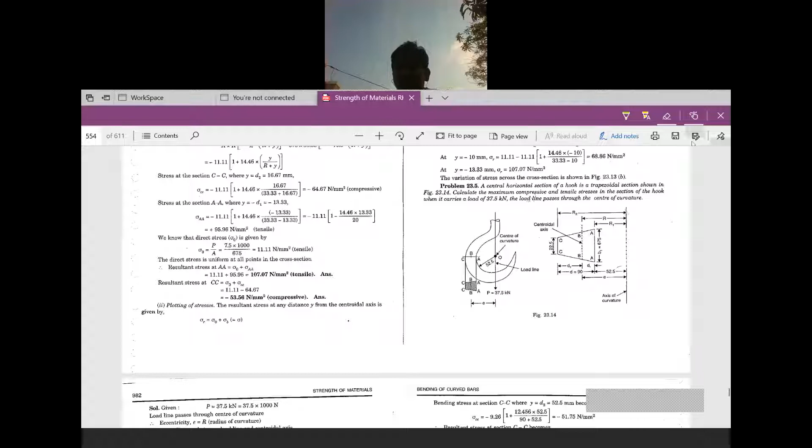Ima, do you have any doubts in the previous sessions, previous problem, previous class, or the first class? Do you have any doubts in the fixed beams? Do you have any doubts in the curved beams? Sir, yesterday I have explained the three problems. Have you gone through it?

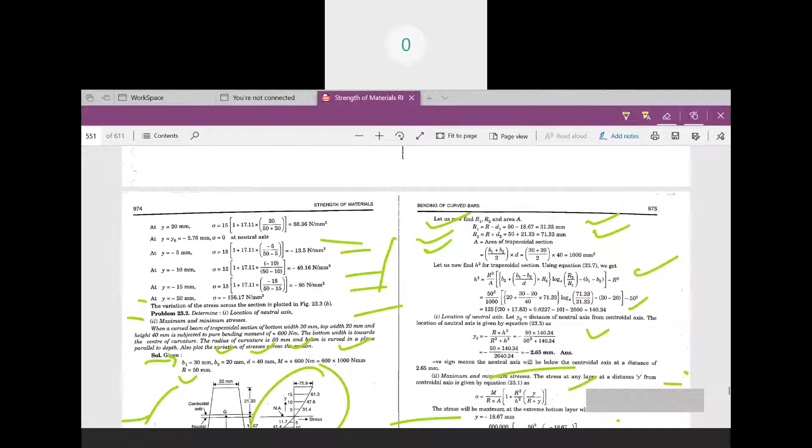Okay, I'm going to start the next section. Today also I am explaining some of the problems, numericals. Then for the next class, we'll go for derivations.

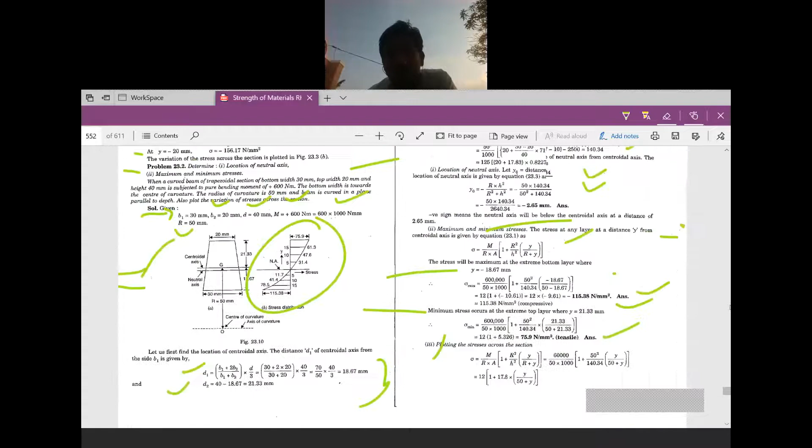So yesterday we have done some problems on the stresses on curved sections, standard sections like trapezoidal, rectangular, and circular sections. We have solved some of the problems on these models. Okay, now we are going for the applications of curved stresses.

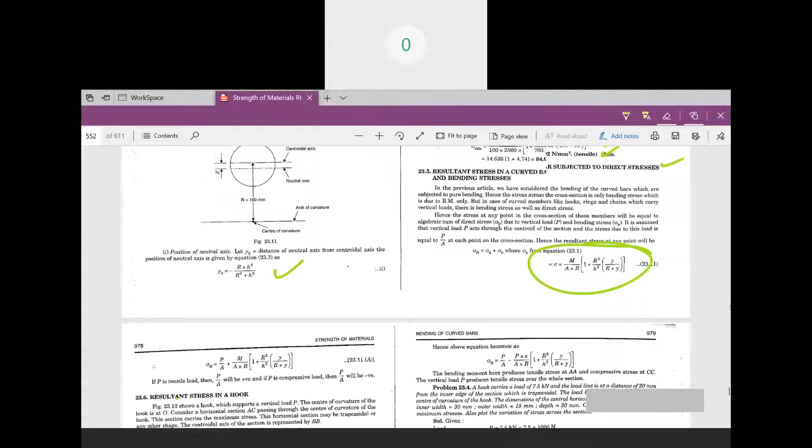Yesterday I have told you here the resultant stress in a curved beam or a curved bar, which is subjected to direct and bending stresses, is sigma r is equal to sigma naught plus sigma b. This will be the resultant stresses acting here.

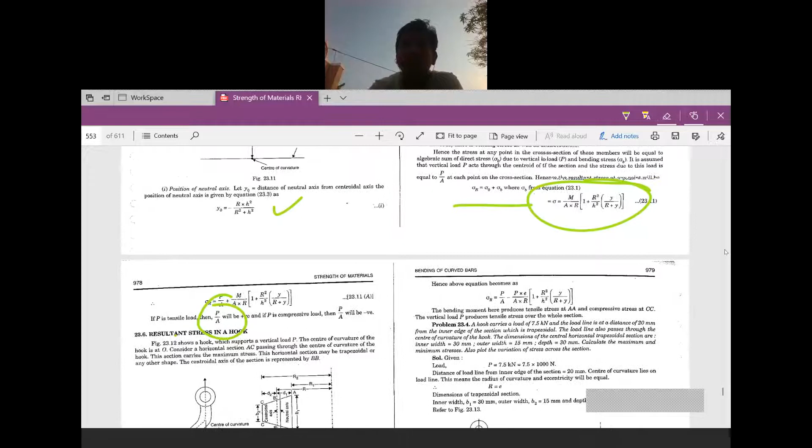Okay, using these stresses, you have a formula sigma r is equal to sigma naught plus sigma b. Sigma b is nothing but the bending stress in a curved beam, whereas sigma naught is a direct stress, which is nothing but p by a. Understand? You have p by a, that is load by area, that is a direct stress.

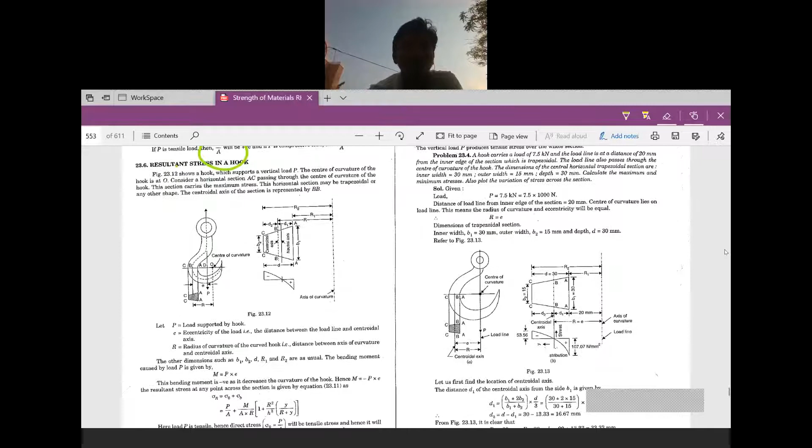Okay, here you are going to study about the resultant stresses. When you see the diagram clearly, here he has given one diagram. Crane hook with a trapezoidal cross section.

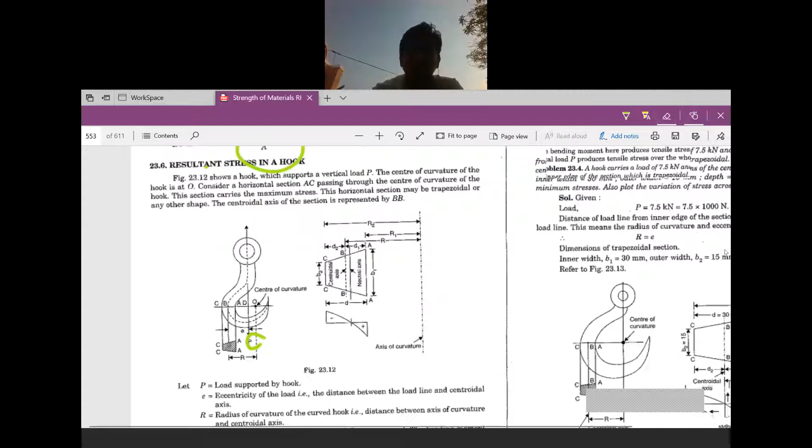Figure shows a hook which supports a vertical load P at this point. When you consider a vertical load here, it is acting exactly at the center of the axis, at a vertical axis. The center of curvature of the hook is at a point O.

When you see here, you have a point O at this point. Understand? Then consider a horizontal section AC which passes through the center of curvature of the hook. We have AC, this is the horizontal section, which is passing through the center of curvature.

The section carries a maximum stress. The horizontal section may be trapezoidal or any other shape. Here he has given a trapezoidal. It should be either trapezoidal, rectangular, circular, or any other shape.

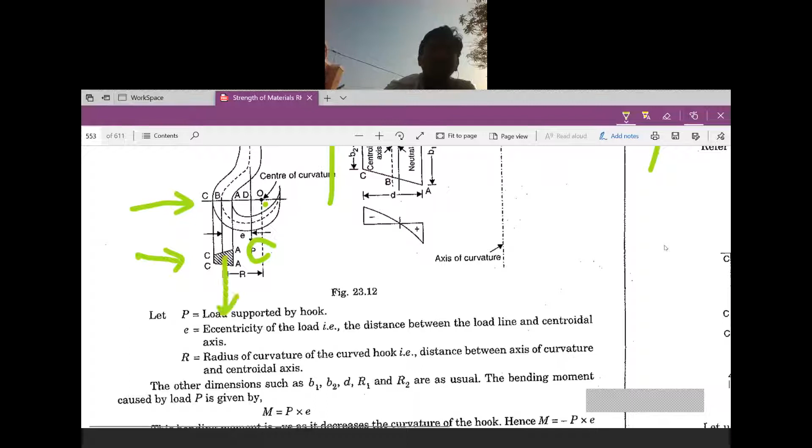Okay, the centroidal axis of the section is represented by BB. Here he has given a centroidal axis of the section, which is denoted by BB. This line is indicated, from B to B. Here BB is nothing but the centroidal axis of a section.

When you see here, he has given a detailed image of this trapezoidal section, with BB as the centroidal axis, B2, B1, and the radius at the centroidal axis of the section is R.

Similarly, at the inner radius from the axis of curvature is R1, and the outer radius from the axis of curvature is R2. Here you know these dimensions, what is D1, D2, B1, B2. You already know all these dimensions from the previous problems. This section has AA as the inner radius, CC as the outer radius.

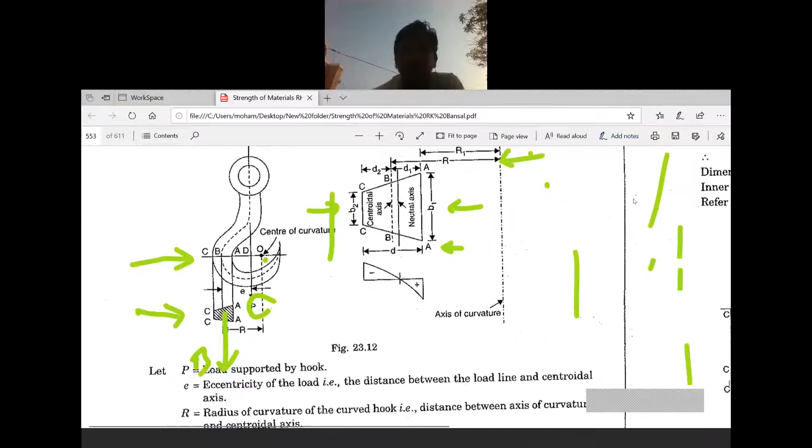Okay, when you see the derivation for this one, here he has taken P as the load supported by the hook, and E is equal to the eccentricity of the load.

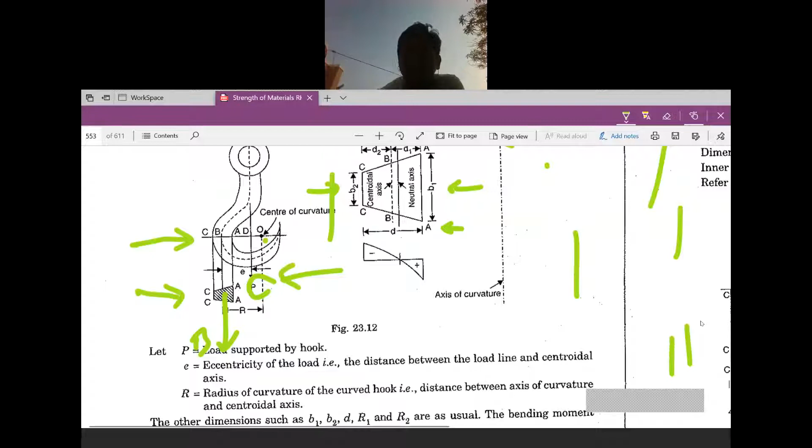When you see in this diagram, the load is acting at E distance from the center of curvature. He has also given the radius of curvature of the hook as R, the distance between the axis of curvature and the centroidal axis. The other dimensions such as B1, B2, D, R1 and R2 are as usual.

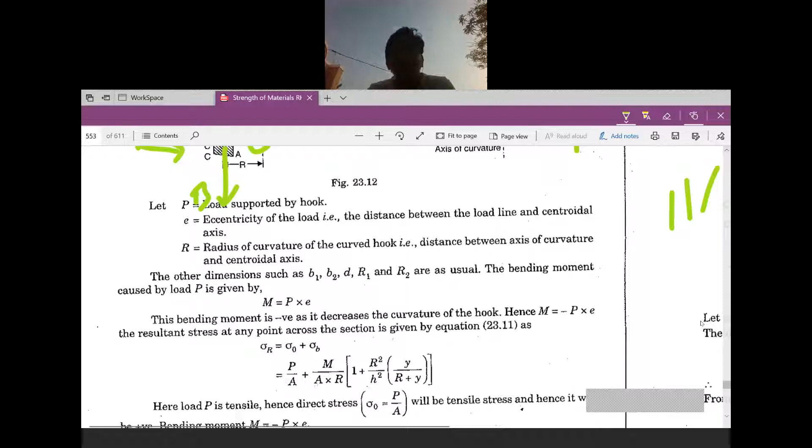The bending moment caused by P is given by, here he is taking the moment caused by P. In this formula, the moment caused by P is P into E. E is the eccentric loading, eccentricity, the distance between the centroidal axis of the section and the load applied, that is P into E.

R is the radius of curvature and eccentricity is E. The bending moment is negative as it decreases the curvature of the hook.

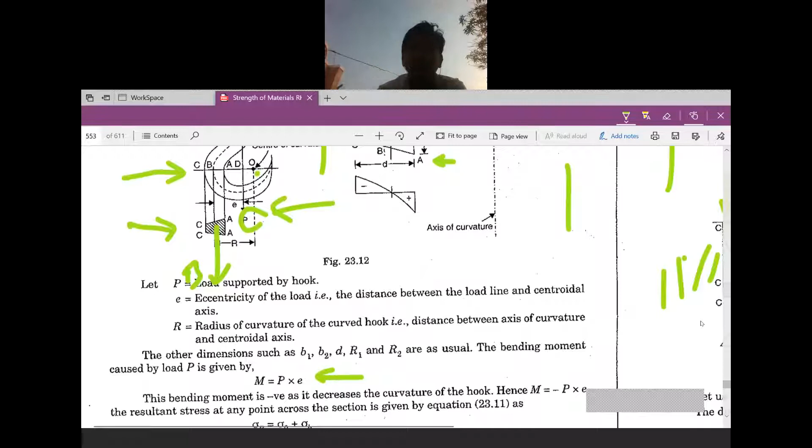When you apply the load on this hook, what happens? I am applying a load here at the center. What happens? The curve will bend like this, it will make the curve become straight.

I'm applying the load, the load is acting downwards. That means the curvature is reducing, the curvature of the section is reducing. So he is considering it as a negative value.

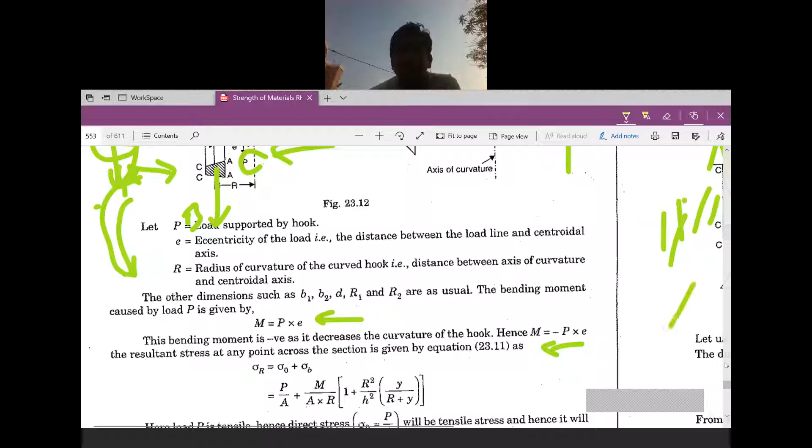Hence M is equal to minus P into E, is the resultant stress at any point across the section given by sigma R is equal to sigma naught plus sigma B. This can be written as P by A plus M by AR into 1 plus R square by H square into Y by R plus Y.

Here load P is tensile, hence direct stress sigma naught is equal to P by A will be tensile and hence it will be positive. Direct load is nothing but a tensile load, it is positive, we are considering it as P by A. Bending moment is equal to minus P into E.

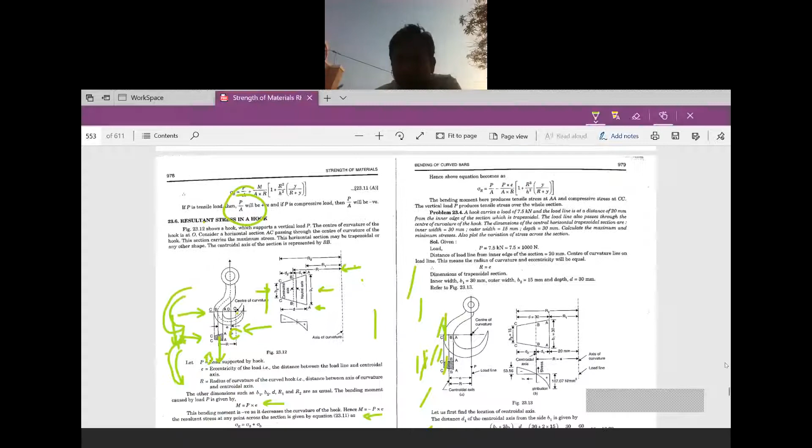You go to the problem. Here the resultant stress can be given as, hence the above equation can be written as P by A minus P into E by A into R.

You may understand this one will be the formula for the resultant stress. Sigma R is equal to P by A minus P into E by A into R into 1 plus R square by H square into Y by R plus Y.

The bending moment here produces a tensile stress at AA and compressive stress at CC. The vertical load P produces tensile stress over the whole section. He is saying that the bending moment produces tensile stress at AA and compressive stress at CC. When you see the diagram here, I have told you that AA means at the inner point.

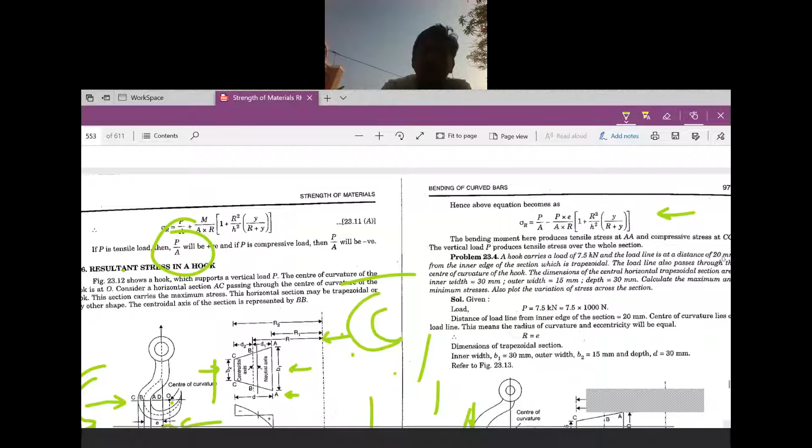When you consider the section like this, okay, here you have a point AA, here you have CC. I am applying the load here, what happens? It will expand like this. Here we have a tensile stress inside and compressive stress outside.

Tensile stress at inside and compressive stress at outside the section. So you are considering it as, at AA the produced stress is tensile, at CC it is compressive. Why? Because when the hook is going to expand, the inner surface will expand.

When you are applying a load outside the hook, what happens? The hook's inside surface will expand and outside surface will compress. So at AA the stress is known as tensile stress, at CC the stress is known as compressive stress.

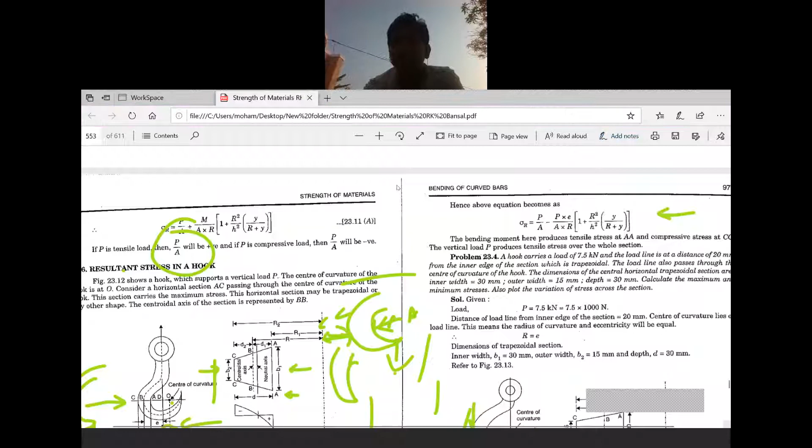Next, we are going to the problem on crane hook. Here he has given problem number 23.4. In this problem, he has mentioned that the hook carries a load of 7.5 kilonewtons. He has given the value of P as 7.5 kilonewtons.

Given the value of P as 7.5 kilonewtons, that is 7.5 into 1000 newtons, and the load line is at a distance of 20 mm from the inner edge of the section. Here he has given in the diagram, he has given clearly the load line is at a distance of 20 mm from the inner edge of the section.

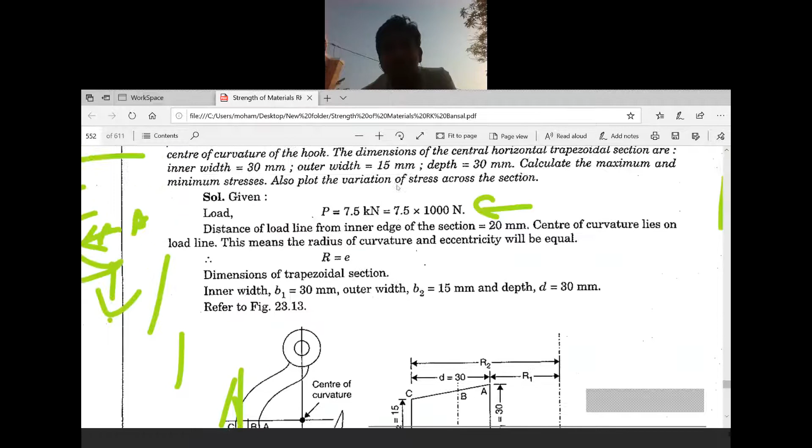And which is a trapezoidal section. The load line also passes through the center of curvature of the hook. In the derivation, the load line is passing at a distance of E from the center of curvature, but here it is passing at the center of curvature of the hook.

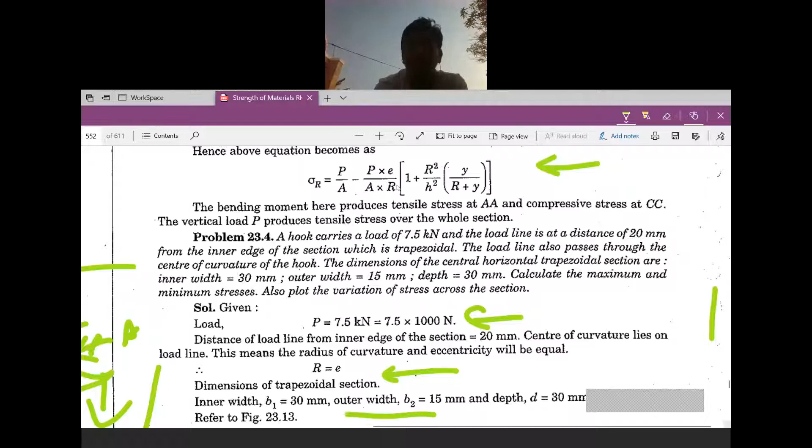The dimensions of the central horizontal trapezoidal section are: inner width, he has given that as B1 equal to 30 mm. Load line is passing through the center of curvature, so R is equal to E here. Then inner width B1 is equal to 30, outer width B2 is equal to 15, depth D is equal to 30.

Understand? Then when you see the diagram here, okay, here we have to draw this diagram. Here he has given this diagram, the diagram will be given by them, you have to draw this.

Okay, you have to consider all these values. Here you have to draw the diagram. He has given a trapezoidal section.

Here outer radius as R2, inner radius as R1, depth as D, this width as B2, outer width as B2, inner width as B1, and the radius of distance from the radius of curvature, that is R1 is equal to 20 mm. Here R is equal to E.

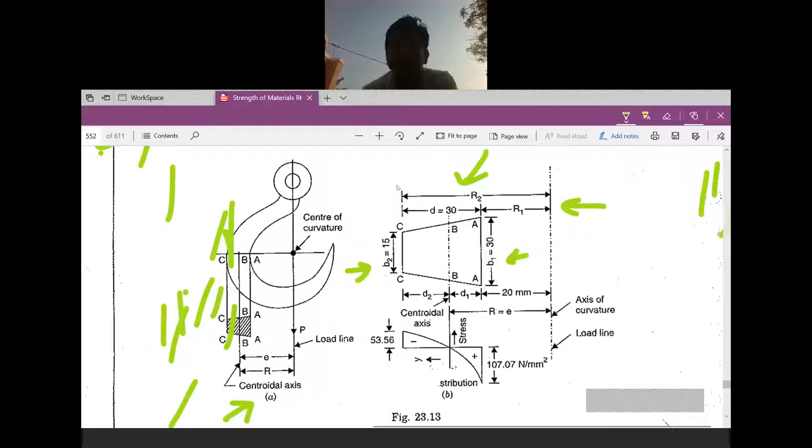Here it is D1, here this one is D2. This is axis of curvature as well as load line. Sometimes the axis of curvature and load line will be with some distance.

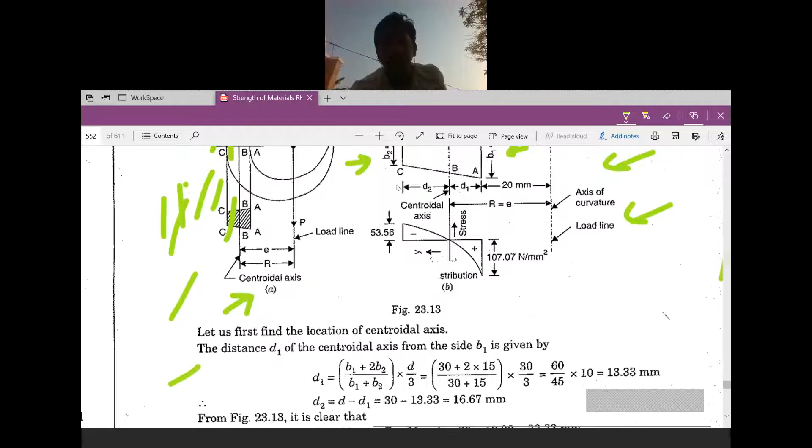So let us first find the location of the centroidal axis. For that, the distance d1, the formula for d1 is b1 plus 2b2 by b1 plus b2. Here d2 is equal to d minus d1. Okay, here we'll calculate this one.

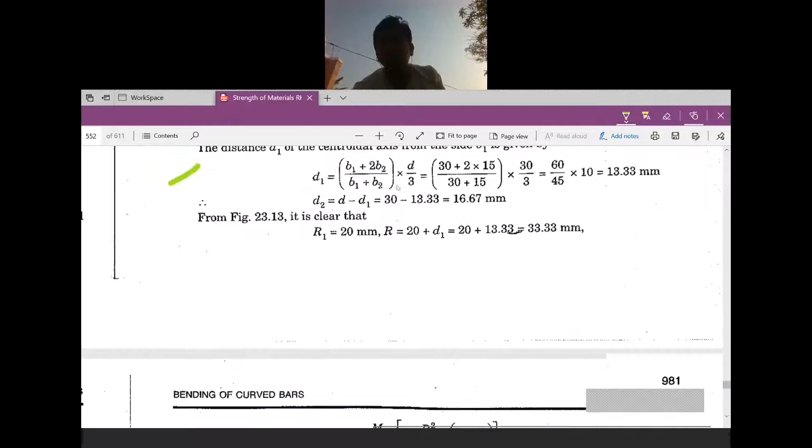Then r1 is equal to 20. Here this r1 is equal to, what is the length of r1 is 20. r2 is equal to, what happens, d plus 20. This total distance is d plus d is 30 plus 20. Total distance is d plus 20. R is equal to 20 plus d1.

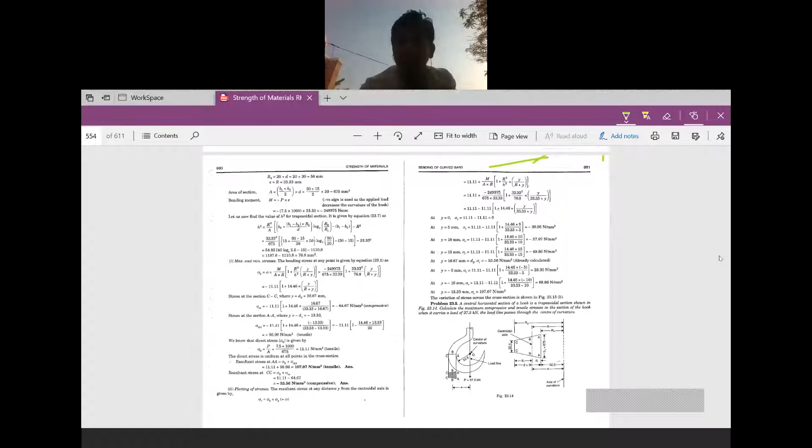Understand? So here you are using, so here R2 is, here R2 is 20 plus D, E is equal to 33.33. You will calculate the area. Area is equal to B1 plus B2 by 2 into D, 30 plus 15 by 2 into 30. Bending moment is M is equal to minus P into E.

Negative sign is used as the applied load decreases the curvature of the hook. Here the load is acting downwards. When load is acting upwards, then it increases the curvature of the hook, then you will take this as a positive sign. Here you are taking it as a negative sign because it is decreasing the curvature of the hook.

Understand? It is decreasing curvature of the hook, so here you are considering the negative sign. Then let us now find the value of h square for a trapezoidal section. This is standard formula for h square for trapezoidal section. You know all the values, you are substituting all the values here.

Similarly, next you are calculating maximum and minimum stress. The bending stress at any point is given by the equation as sigma b is equal to m by ar into 1 plus r square by h square into y by r plus y. Here this one will be the value, this one will be the equation.

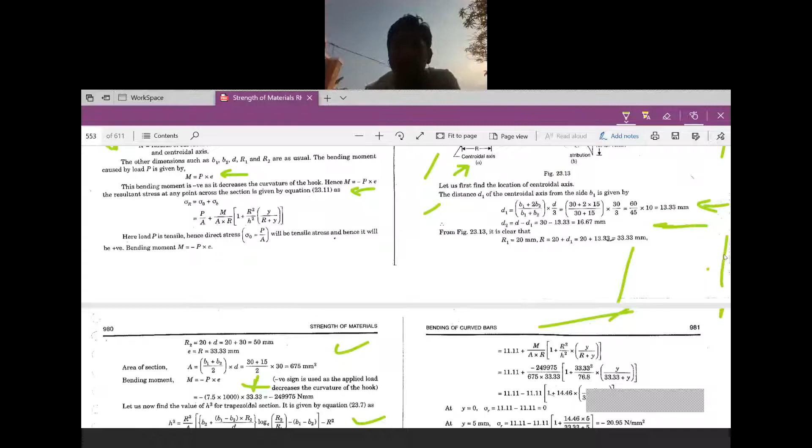Y value is, D2 is equal to 16.67. And then stresses at section A where D1 is equal to minus 13.33. So substituting these values here, D1 and D2 values. Here you have these two values, D1 and D2. Here you are considering these values from here, D1, D2. One is for inner section, another one is for outer section.

Then here you have calculated sigma at CC and sigma at AA with the two values. We know that direct stress is equal to load by area. Load he has given, area we have calculated. You will get this sigma naught also.

The direct stress is uniform at all points in this cross section. The resultant stress at AA is sigma naught plus sigma AA. The resultant stress at CC is, why you are taking at AA as positive means here it is expanding at AA and compressing at CC. So you are taking sigma negative value here. Sigma CC as a negative value and sigma AA as a positive value.

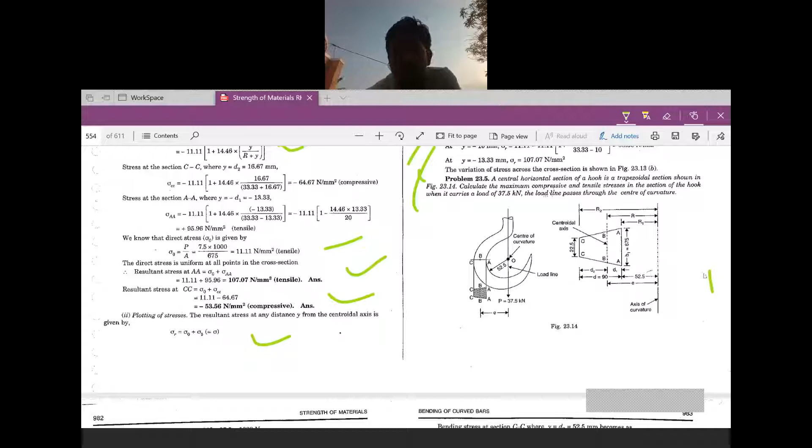Now you are plotting the stresses. The resultant stresses at any distance y from the centroidal axis is given by sigma r is equal to sigma naught plus sigma b. Here you are considering the same problem here, again considering this formula and substituting the values.

Again you are considering the same formula and substituting the values: 11.11 minus 11.11 into 1 plus 14.46y by 33.33 plus y.

Here you are substituting all the values from positive to negative at y equal to 0. When you see the diagram, you have taken the centroidal axis here. This is the centroidal axis. Outside you have negative stresses, and on this side you have positive stresses. Why? Because it is expanding inside and compressing outside.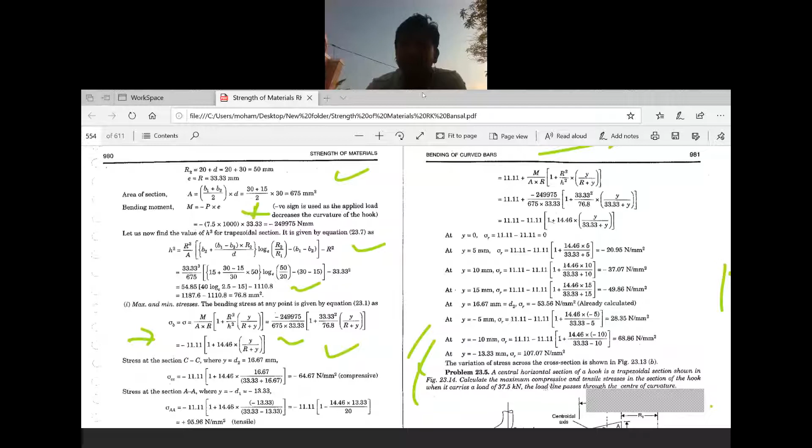So you are substituting y equal to 0, y equal to 5, y equal to 10, y equal to 15, y equal to 16.67. Next, y equal to minus 5, y equal to minus 10, and y equal to minus 13.33. Understand? You're substituting all these values.

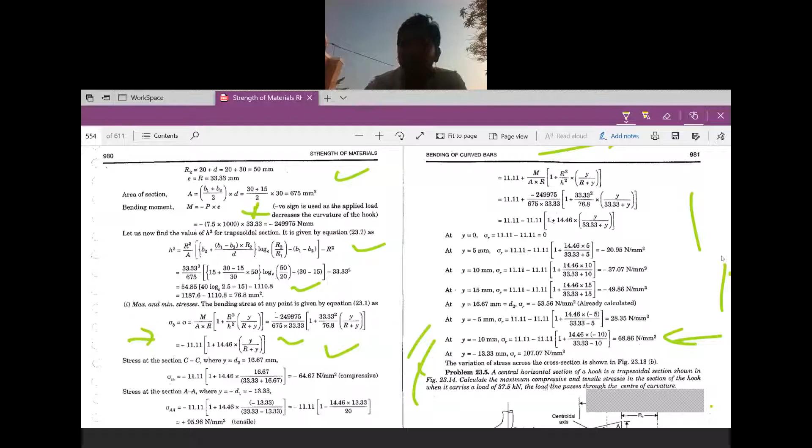After that, we'll plot up to here. You are substituting all the values. The variation of the stresses is seen in the section. In this diagram, you are plotting the stresses clearly, taking values up to 0, then up to 13.33, and drawing the diagram with these plots. Understand?

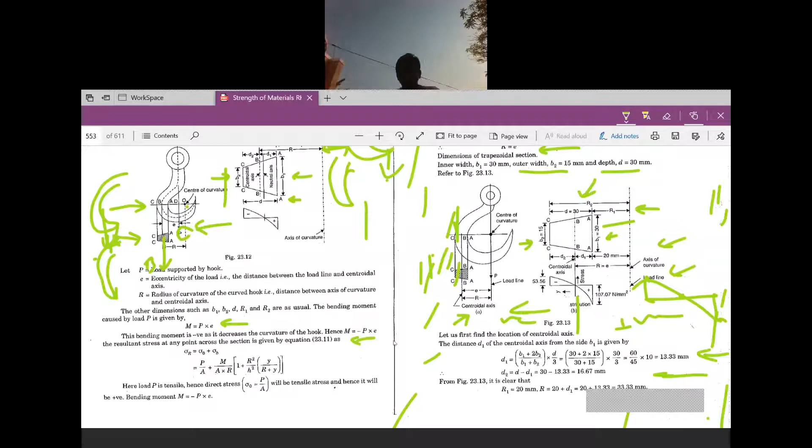Do you have any doubts in this problem? No, anybody has any doubts in this problem?

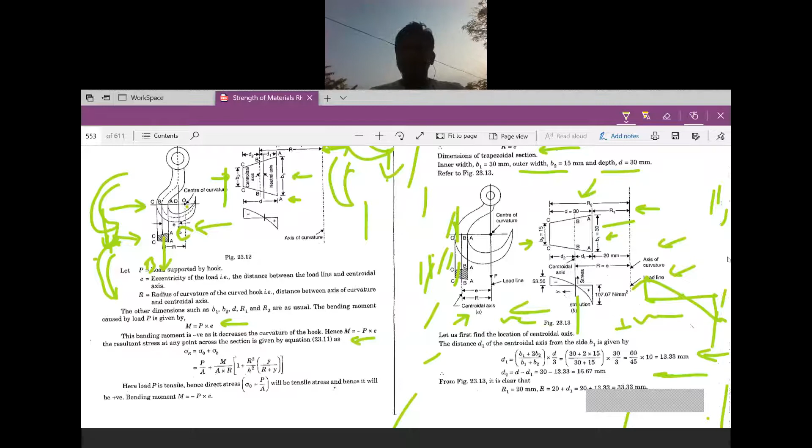So in the next problem, he has given a central horizontal section of a hook as a trapezoidal section, shown in the figure already given. Calculate the maximum compressive and tensile stresses in the section of the hook.

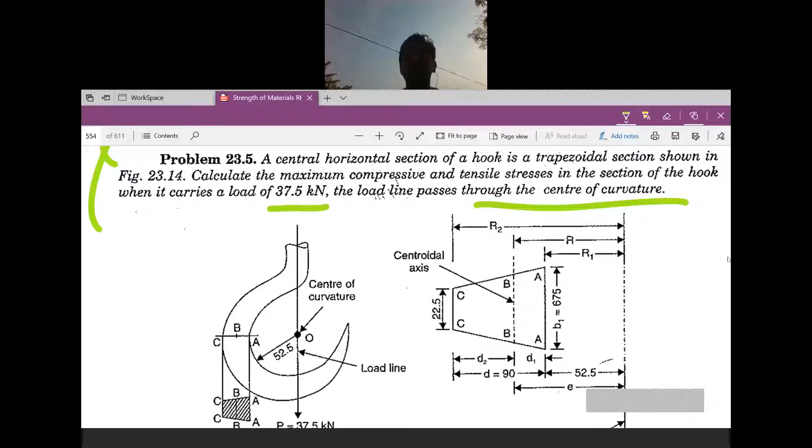It carries a load of 37.5 kilonewtons. The load line passes through the center of curvature. Already it is given that the load line is passing through the center of curvature.

So in this problem, here he has given all the values. The load of 37.5 kilonewtons acts at the center of curvature, and the inner radius R is 52.5. E is the distance between the center of the section and the radius of curvature. R is 52.5, and he has given all the values: inner D is 90, B1 is 67.5, and B2 is 22.5. This is R1, R2, and E.

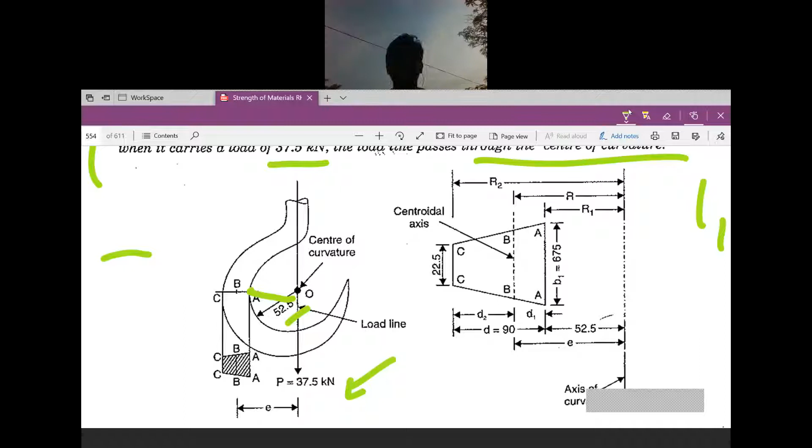Understand? It's given all the values directly, following the same process. The load is also acting downwards. In the same manner, here you will calculate all the values. The bending stress is calculated, in the same manner, given load is...

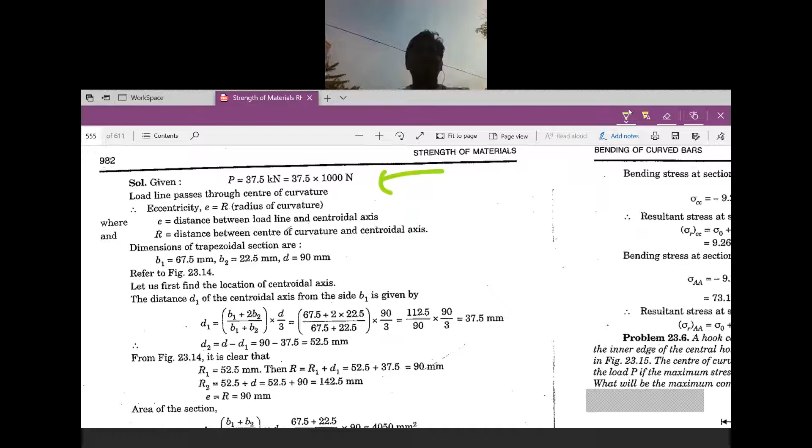The given load is 37.5 kilonewtons. The load line passes through the center of curvature. Eccentricity is E, and the dimensions of the trapezoid are B1 equal to 67.5, B2 equal to 22.5, D equal to 90 mm. Let us first locate the centroidal axis, that is D1.

We'll calculate D1 from this formula, then you will get D2. Then writing the value of R1 and R2: R1 is equal to 52.5, R is equal to R1 plus D1, R2 is equal to 52.5 plus D, and E is nothing but R here, because it is passing through the center of curvature. Then area is B1 plus B2 by 2, direct formula substitution.

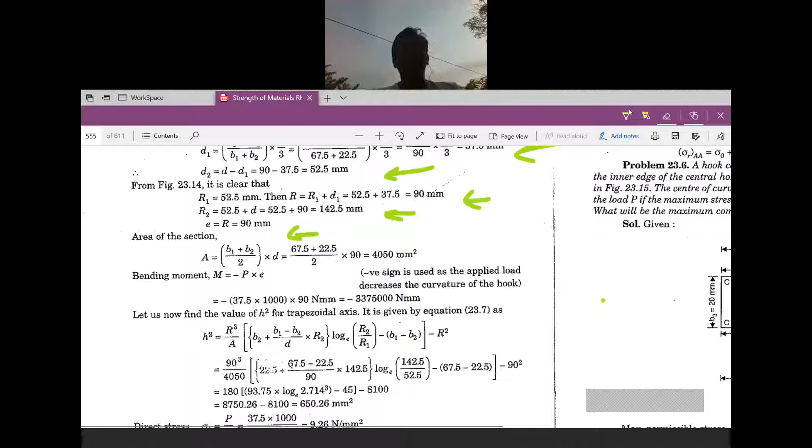Here also the load is acting in a downward direction, so the curvature is negative. Okay, so you are considering it as a negative sign, because the load applied decreases the curvature of the hook. If it increases, we'll consider the positive value.

Here it is decreasing, so you consider negative - all of you remember this, it's very important. The curve is like this. I'm applying the load here; what happens? It is decreasing. If the curve is like this and I apply the load upward, then it increases the curvature, and you take a positive value.

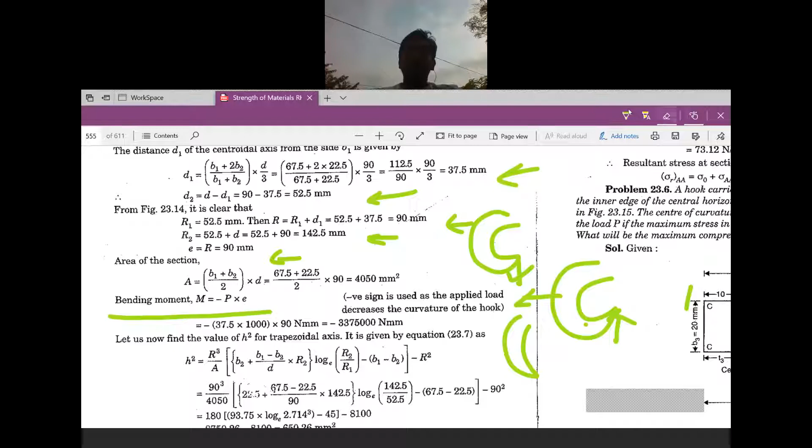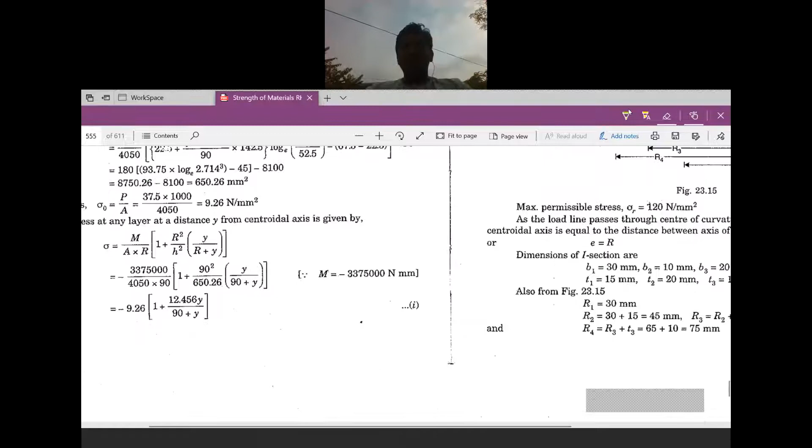Then you are calculating the value of h square, then substituting x, sigma naught is equal to P by A, then calculating sigma value, the bending stress M by Ar into 1 plus r square by h square into y by r plus y. You are substituting all the values except y, then substituting the value of y.

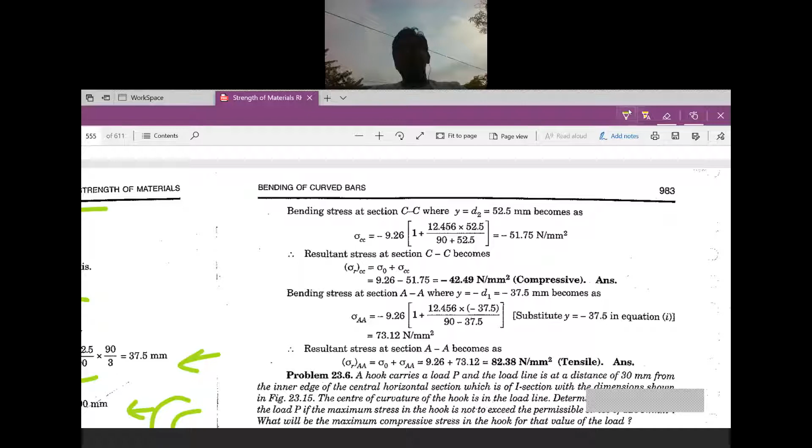Bending stress at section CC, that is y equal to D2, that is 52.5, then similarly resultant stress at section CC becomes sigma naught plus sigma CC. The bending stress at section AA, y equal to minus D1, that is minus 37.5 mm, becomes this value. It is a negative value, so you substitute it here: sigma AA and sigma CC.

Then resultant stress at AA becomes sigma R equal to sigma naught plus sigma AA, that is 9.26 plus 73.12. This way you will calculate and solve these problems.

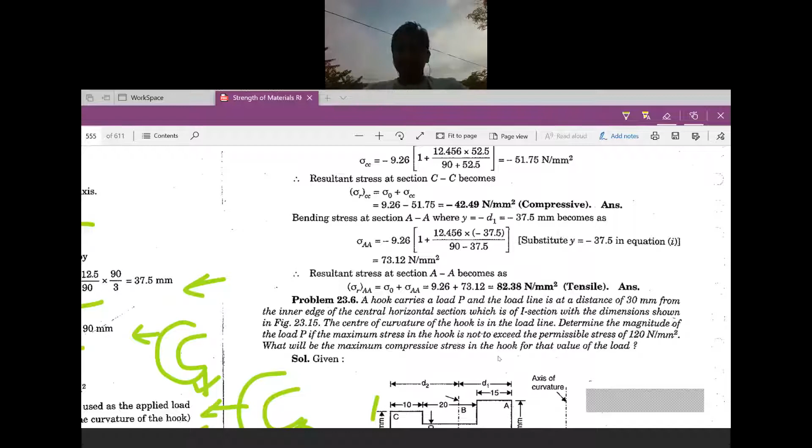You must understand the same problem, as he has given it again, only with different dimensions.

Do you have any doubts?

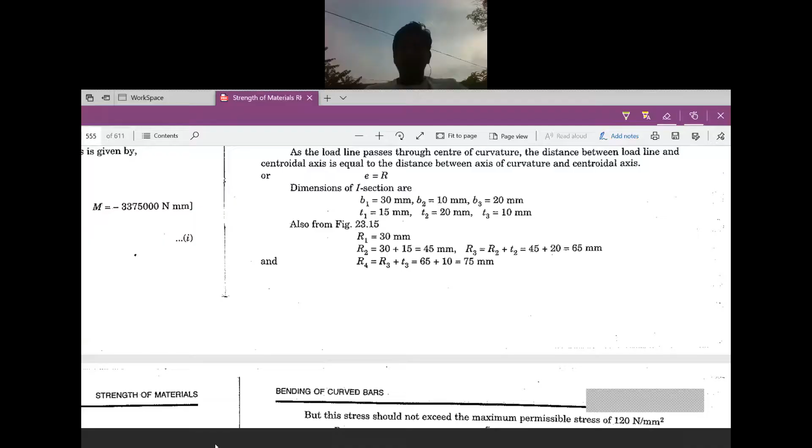Here he has given. Umar, keep it in the bucket, in the bucket. Umar, one second. Umar, Umar.

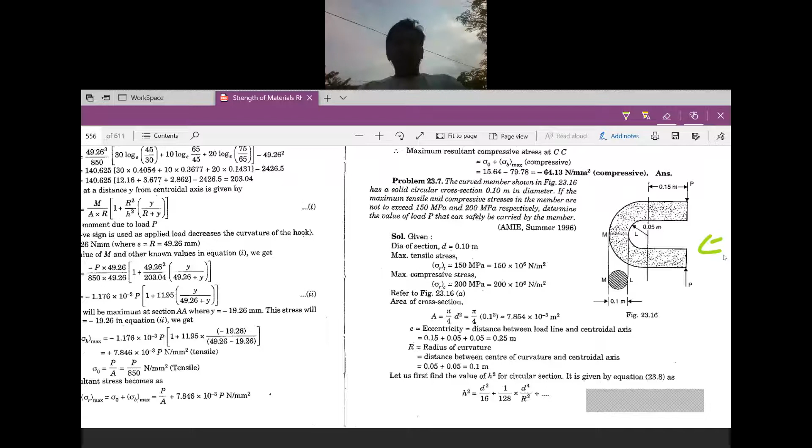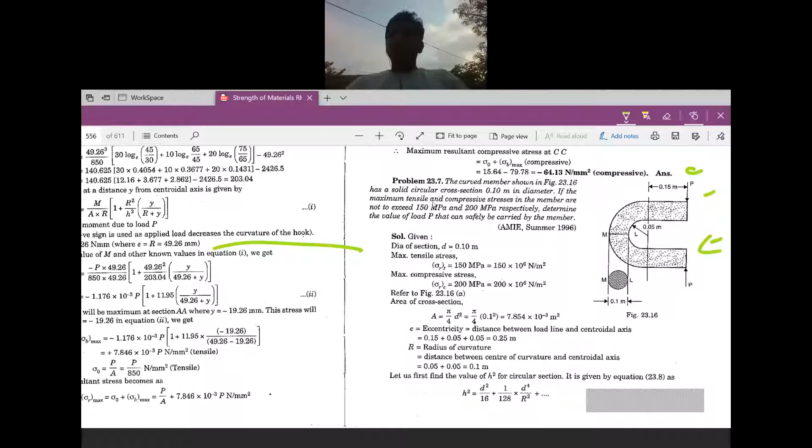Determine the value of load P that can safely be carried by the member. He has given a load P at this point, 0.1 meter from the centroidal axis.

Writing the given data: diameter as 0.10 meters, maximum tensile stress is 150 megapascals acting at L, and maximum compressive stress is 200 megapascals.

Then area of cross section, A is equal to pi by 4 d square, writing in terms of meters.

Then eccentricity is equal to the distance between the load line and the centroidal axis. Here the centroidal axis is 0.15 plus 0.05 plus 0.05.

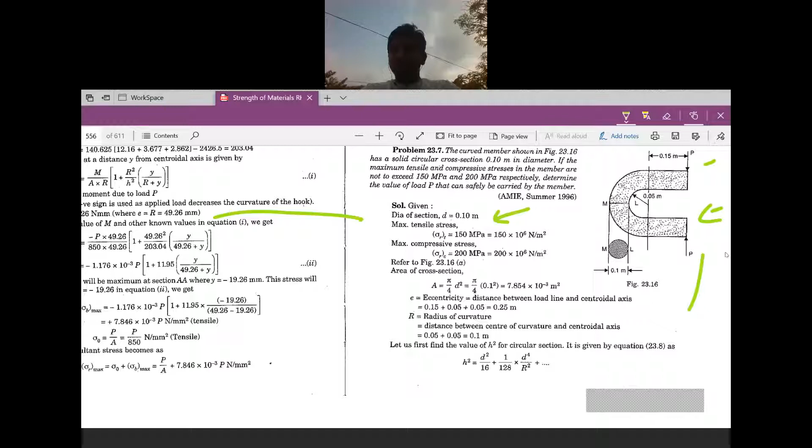Understand why you are writing this: when you see in the diagram, this distance up to this axis is 0.05, and to the center of the circle again it is 0.05. This one is 0.05, this one is 0.05, and this distance is 0.15 meters.

So this eccentricity is 0.15 plus 0.05 plus 0.05, that is 0.25.

Then radius of curvature is the distance between the center of curvature and the centroidal axis, which is 0.05 plus 0.05, that is the distance between these two lines. That is nothing but the radius of curvature, which is 0.1 meters.

Let us first find the value of h square for circular section. The formula is h square equals d square by 16 plus 1 by 128 into d to the power 4 by r square.

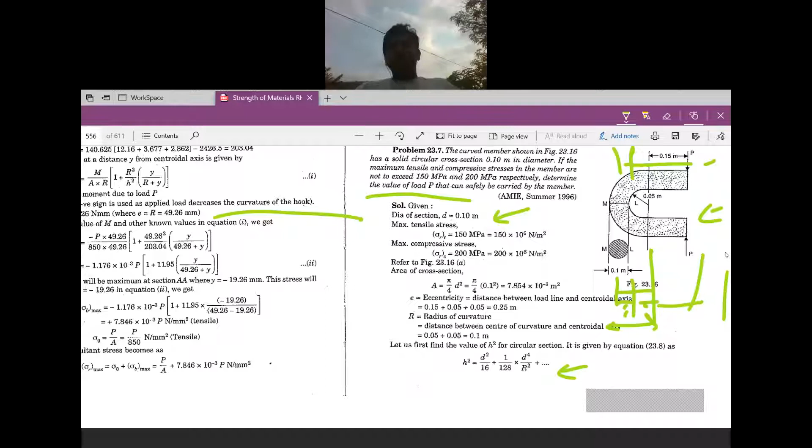Here you have to calculate the load P. In the previous problems, he gave the load P and we calculated the resultant compressive and tensile stresses. But here he has given the resultant stresses, so you have to calculate the load P.

So here you are calculating the value of h square by substituting the values: R is equal to 0.1, D is equal to 0.1. Then load line to the center of curvature is 0.15 meters, and this one is 0.05, as I have explained R is equal to this.

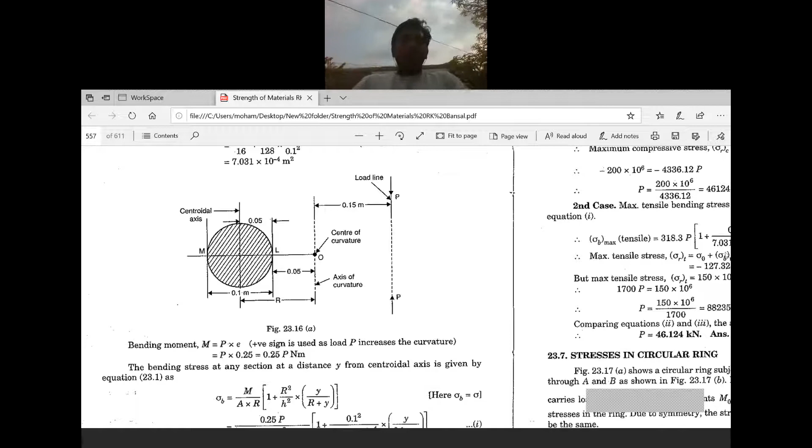So bending moment is nothing but P into E. He has given a positive sign used as the load P increases the curvature. Understand? When you see in this problem, I am applying the load here.

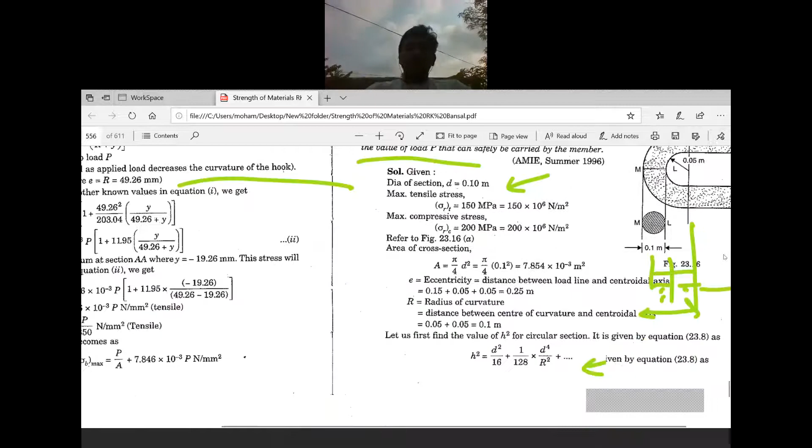You see this problem, I am applying the load here. The C section is like this.

I'm applying a load here. What happens? It will compress like this, it will move down and compress like this. The compression takes place and the curvature increases due to this.

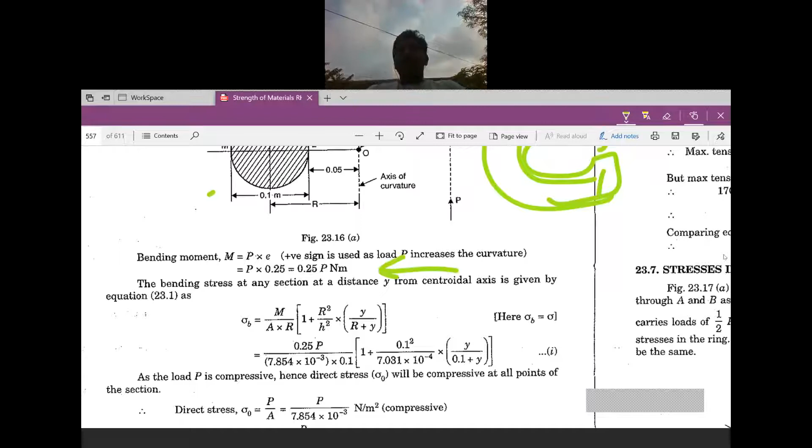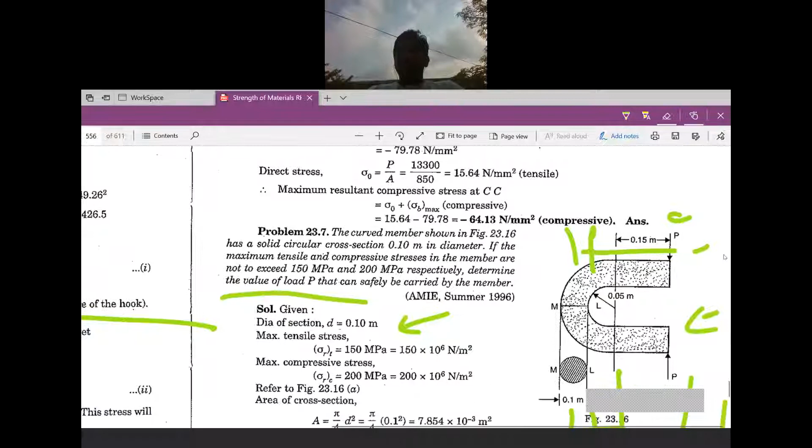So you are considering the positive sign instead of negative sign for the bending stress at any section. Whenever you apply the load on this C section, here, here and here, it is going to compress like this, compress inside. So you are considering it as a positive value.

Now this is a very important point. Why are you considering positive and negative values? After that, you calculate the bending stress sigma b = M/Ar into (1 + r²/h²) into (y/(r+y)). Here you know the values.

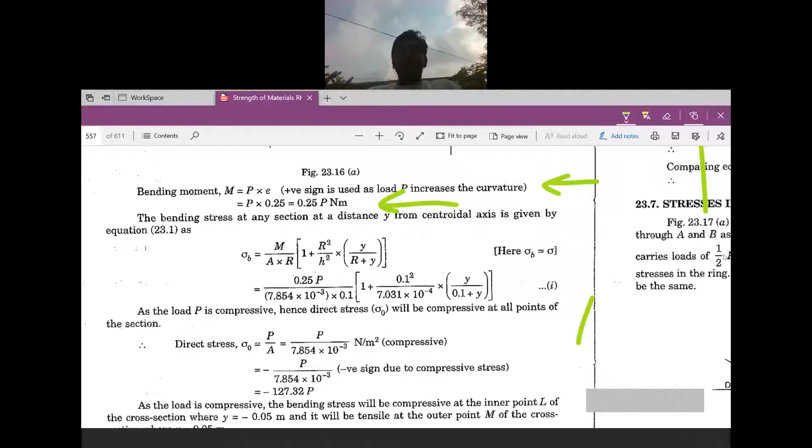The direct stress is P/A, sigma naught equals P/A. You don't know the value of sigma naught yet. Negative sign: direct stress sigma naught equals P/A, that is compressive, so it is equal to minus.

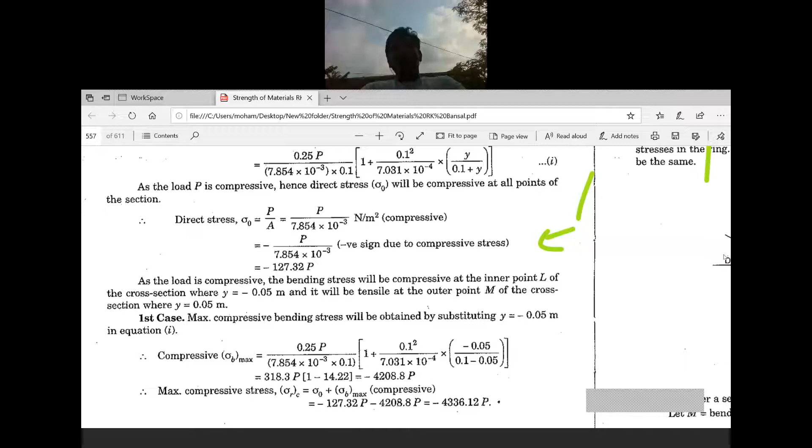As the load is compressive, the bending stress will be compressive at the inner point L of the cross section, where y is equal to minus 0.05 meters. It will be tensile at the outer point M of the cross section, where y is equal to 0.05. Understand? As the load is compressive, the bending stress will be compressive at the inner point L. Why is it increasing? Because of the curvature. Similarly, the negative sign indicates 0.05, while it will be tensile at point M, where y is equal to 0.05 meters.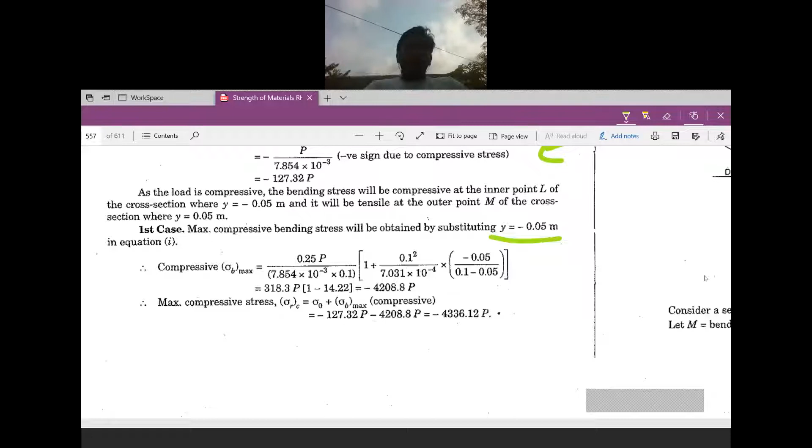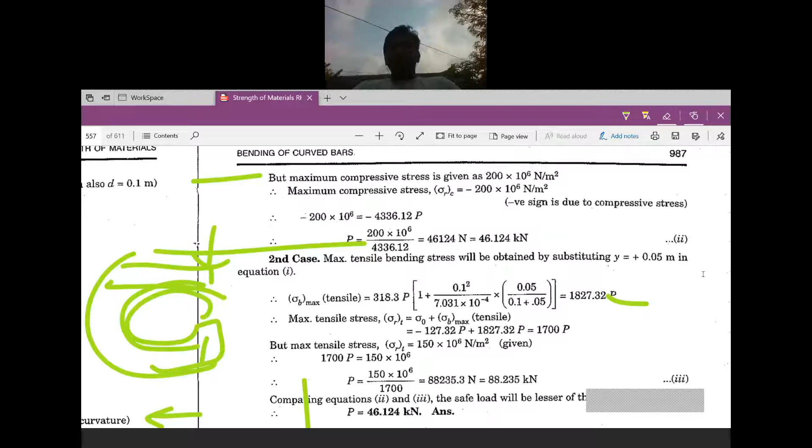First case: the maximum compressive bending stress is obtained by substituting y equal to minus 0.05, giving the maximum compressive stress sigma b. The maximum compressive stress formula in terms of P is used. The maximum compressive stress is given as 200 into 10 power 6 Newton per meter square. Substituting the value and simplifying, you get the maximum value of the stress.

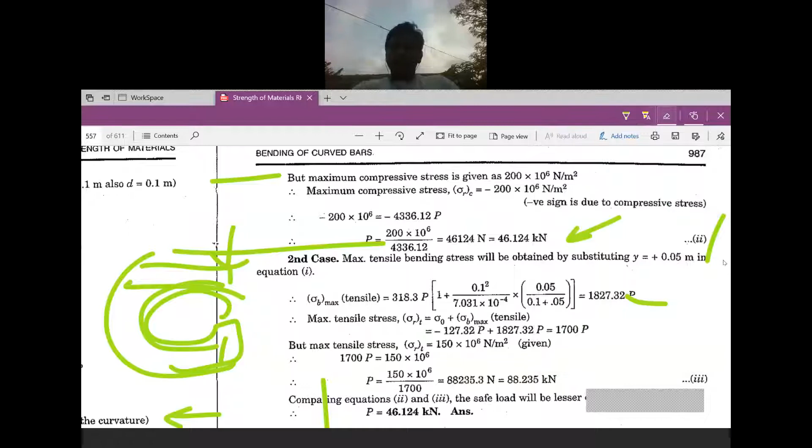Similarly, the maximum tensile bending stress is obtained by substituting y equal to 0.05 meters in the equation, giving sigma b tensile. Substituting y equal to plus 0.05, you get the maximum tensile value sigma b tensile in this equation.

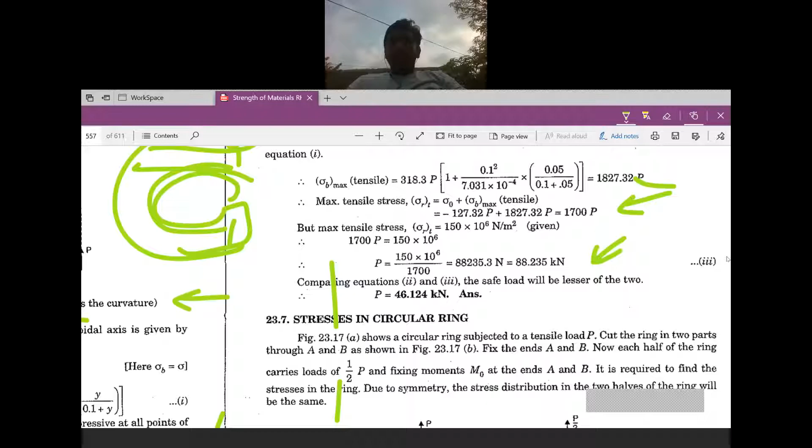The resultant tensile stress sigma r equals sigma naught plus sigma b max. Here the unknown is found using the given maximum tensile stress of 150 into 10 power 6 Newton per meter square, and you calculate the unknown value P. The calculated value of P is 46.124 kilonewtons. This is how you have to solve these problems.

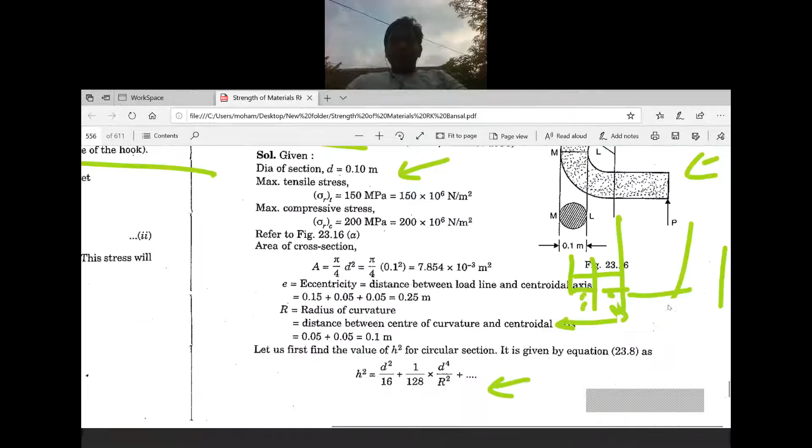Do you understand? Do you have any doubts in this problem? Okay.

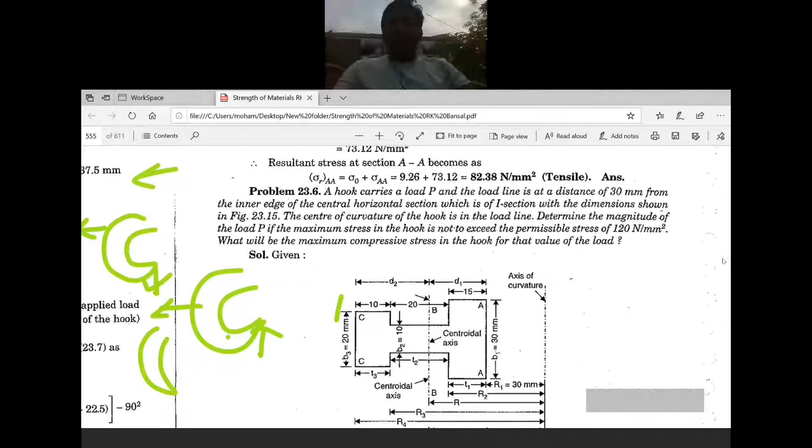That is an I-section, but we don't have I-section in the syllabus. We only have circular section, trapezoidal section, and rectangular section. We have already seen circular section and rectangular section.

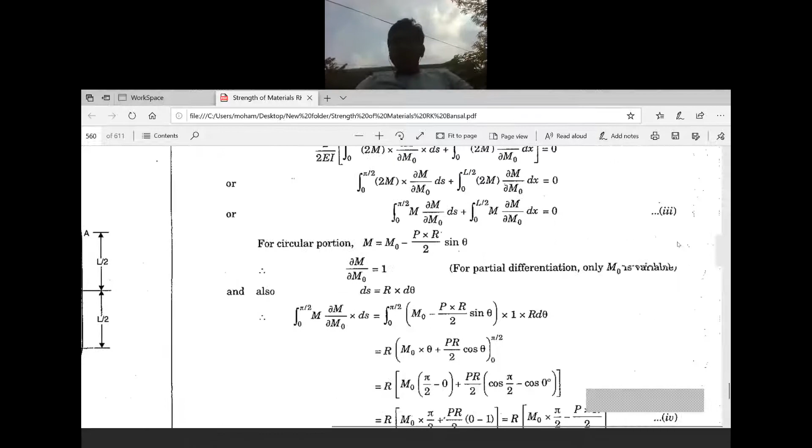Do you have any doubts up to this point? Does anybody have any doubt?

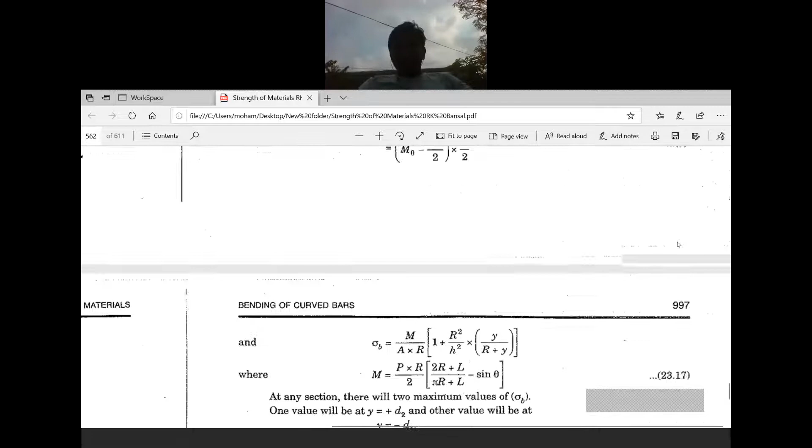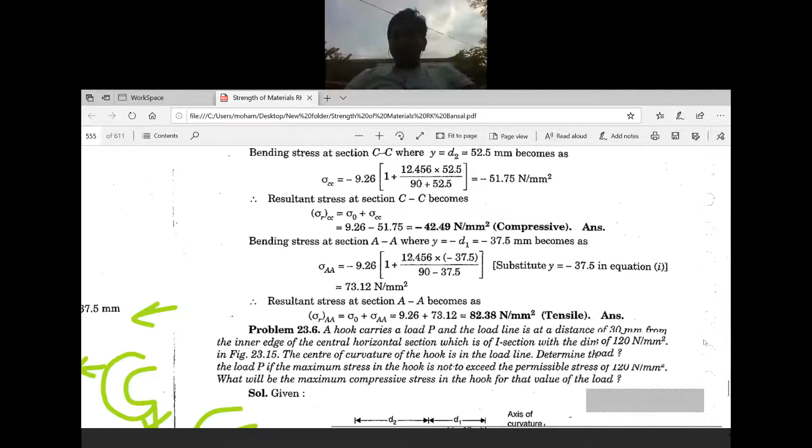We only have crane hook and C sections in the syllabus, so just go through the syllabus book. Then we have derivations. We will solve the derivations in the next class.

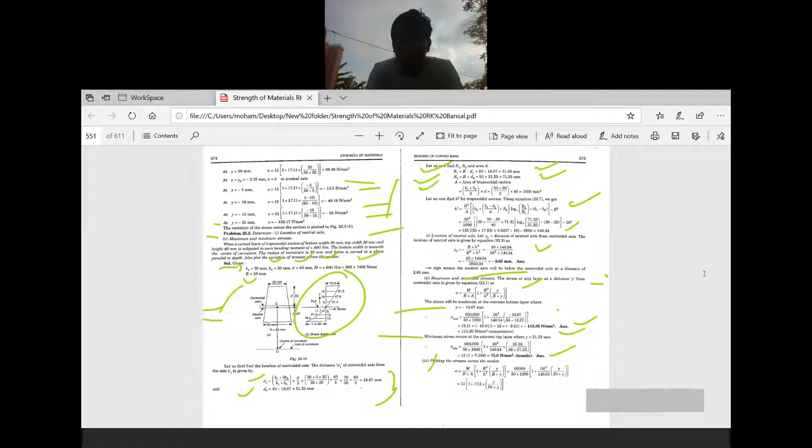Does anybody have any doubts? Okay, next. In the next class we'll go through all these derivations.

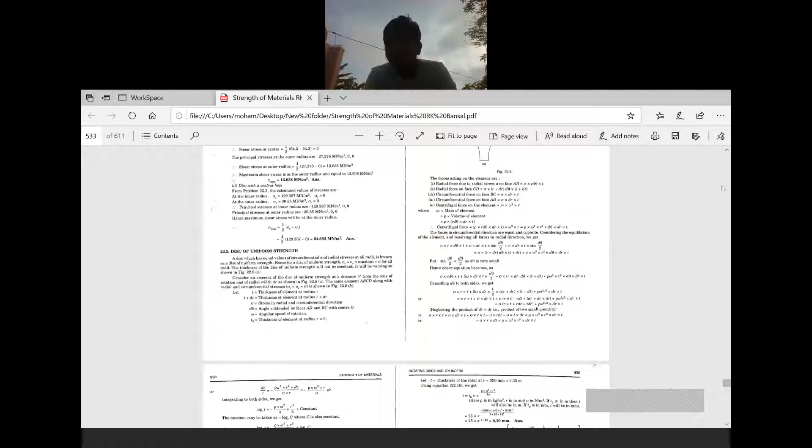So we have derivations, we'll do these in the next class. The next class will be on Monday. You have classes Monday, Tuesday, Wednesday, and Thursday, four days only. Meanwhile, go through those derivations and these problems. If you have any doubt, you can ask me in the next class.

Are you able to understand? If you have any doubts, you can ask me in the next class. Okay, any doubts?

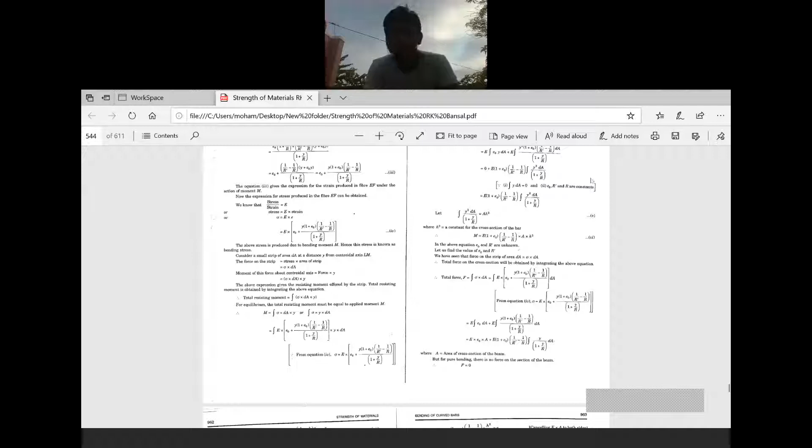Okay, once this derivation part is completed, this chapter will be finished. Then we will move to the fourth unit. Maybe on Tuesday I will start the fourth unit. The fourth unit also has only derivation and problem-solving parts.

Can you conclude this class?